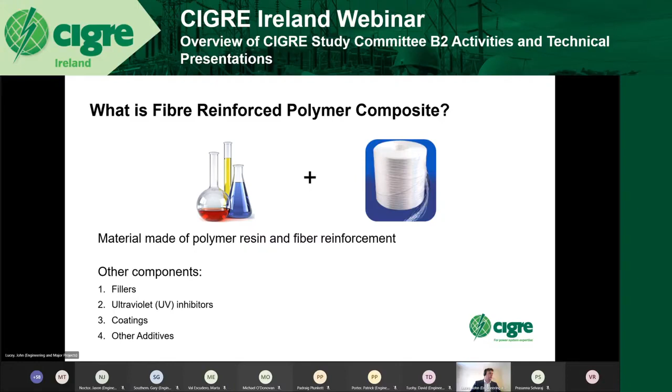Looking at the fibre types, there's a range of fibres now typically available. I think everyone's aware of carbon fibre, glass fibre or fiberglass, as most people would refer to it. There are other fibre types like basalt fibres and aramid fibres, which is Kevlar. I think there's boron fibres as well. But typically it's e-glass, so fiberglass is typically used for overhead line structural applications.

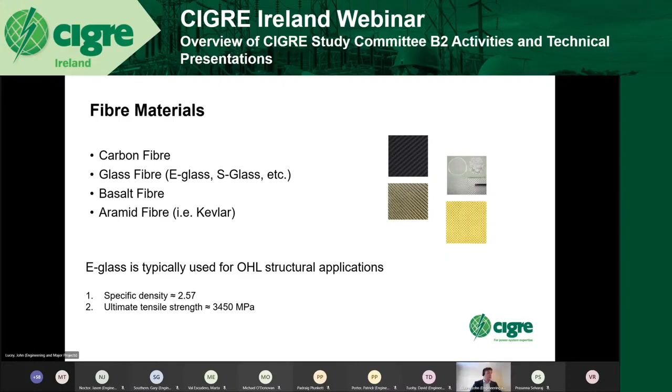The main reason: while carbon fibre is lighter than e-glass and has a higher stiffness, it's much more expensive, and some of its properties and process characteristics are not well suited for use in composite utility construction. So typical reasons for using e-glass: high production rates, relatively low density, it's heat resistant, good chemical resistance, it's relatively insensitive to moisture. It's non-conductive, but for overhead line structural applications it's not a certified insulator. But probably the main reason is the low cost relative to other fibre options.

The thing to note on the resin systems is that typically there are two major classes of resin: thermoplastic resin and thermoset resin. The thermoplastic resin is pliable or moldable above a specific temperature, so you can reform it, whereas the thermoset resin sets and that's it. Typically it is the thermoset resin that's used for transmission structures. Depending on the requirements, anywhere between 30 and 70% of the volume could be resin, and vice versa for the fibres. Typically for overhead line structures, you try to keep the fibre content quite high because it gives you the material properties you want.

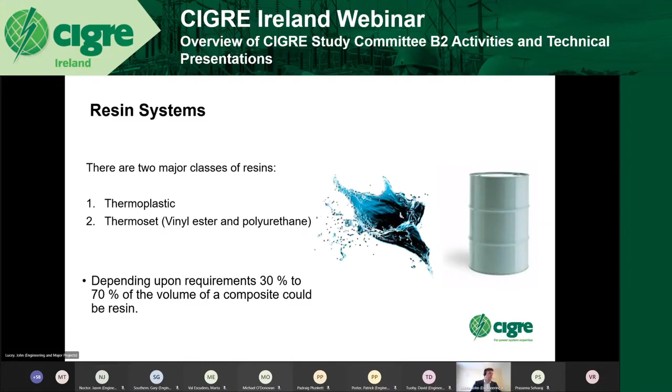The manufacturing process: I've just pulled out the two main manufacturing processes that are used at the minute for making FRP materials for overhead line structures. There are two other primary methods of making FRP material. There's a centrifugal casting method, which I think is used for concrete poles as well, and there's also a resin infusion method, which I think is used for wind turbine blades. But primarily for overhead line applications, it's a pultrusion method or a filament winding method.

To go through the pultrusion method, you have the creels of fibres which are pulled through a resin bath, so they get coated in resin. They're then forced through a heating die, formed into the shape you need and then cut to length. Probably the main thing with pultrusion is high output. It's a continuous process, similar to making steel.

Whereas with the filament winding process, it's slightly different. It starts off the same. The fibres are pulled through the resin bath, but after that, it's guided onto a spinning mandrel. So probably the big advantage of filament winding over pultrusion is that you can taper the shapes.

Because you can taper them, you can stack them, you can modularize the poles themselves, and you can stack them on top of each other, where you can't really do that with pultrusion. They're all the same size. So typically for the pultrusion poles that are on the market, you'd get to about 18 or 19 meters max. Whereas the filament wound poles, you can go up to anything up to even 52 meters.

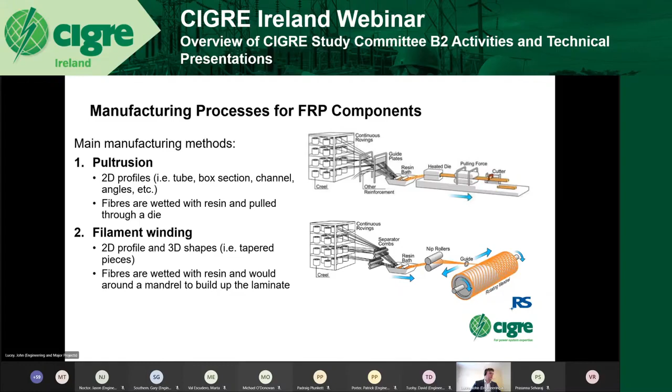Advantage of FRP structures, as mentioned, I think everyone's probably aware of, there's a weight reduction. Anything up to 25%, or down to 25% of steel weight can be observed. That's probably at the extreme end, though. They're non-conductive, again, although they're not a certified insulator, which is an important point.

They have a long service life, so I'm not sure whether you can make out on the image on the top right, but on the actual tag, it was installed in 2009, and the pole itself in the background is as good as day one. The only issue is actually the self-tapping screws, which have started to rust. So I think the learning from this was the actual pole supplier in this case actually switched to stainless steel self-tapping screws.

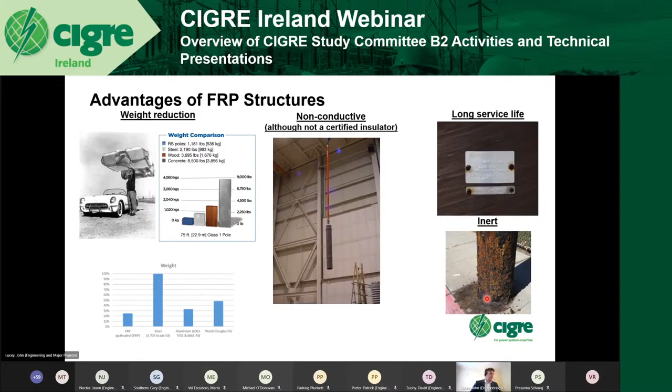They're inert, so you don't get leaching like you could potentially get in creosote poles, wood poles. They're rot resistant, again, when compared to wood poles, they're corrosion resistant compared to steel. And probably another one, although not a major issue for the Irish climate, is they're pest resistant. So the last one here is actually, believe it or not, woodpecker holes in poles, which is a big issue in America.

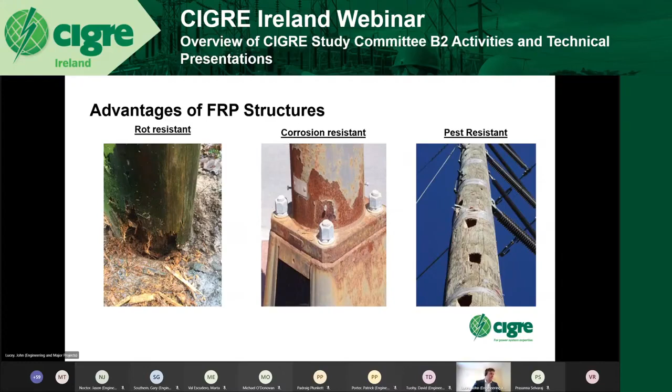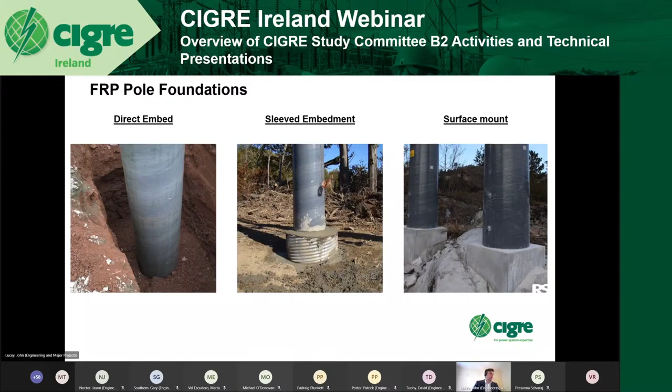Pole foundations themselves, so a quick slide on that. Typically, you try to stick to direct embed. It's the cheapest option. But as maybe the soils get poorer or the structures get higher, you start getting into sleeve embedment, where you put a sleeve in the ground and you either fill it with backfill material or concrete. For rocky ground conditions, you can also surface mount the poles. So the main thing is, depending on what ground conditions you have, there usually is a solution for installing them.

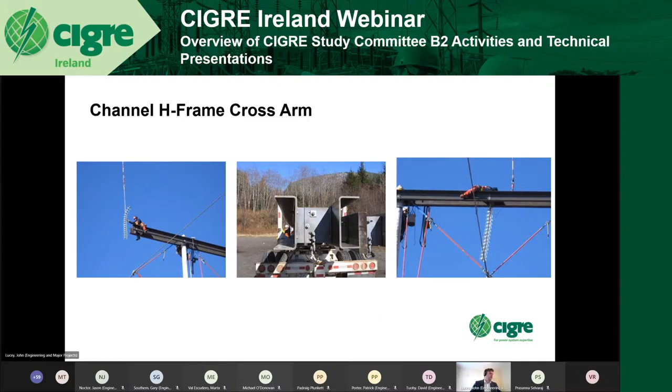Just one or two slides on cross arms. Obviously, the focus of the presentation up to now has been on poles and lattice structures, but cross arms are another opportunity to use FRP. So there's 3 examples here, I think again from the US, where they have been using FRP cross arms. Here's another example where nearly the entire structure is composite. So you have composite poles, composite cross arms, and composite cross braces. Typically, the connections are still steel, but the bulk of the material is composite.

Just one or two slides on a cost comparison, which was included in the technical brochure. Probably the main caveat is the cost section offers guidance to put a business case together to justify the use of FRP material. The actual figures would probably need to be calculated on a country by country basis and project by project basis, because they are quite specific and sensitive depending on tooling and work methodologies in particular countries, and climate and ground conditions.

Probably the main thing is FRP poles cost more to purchase than wood poles. Typically, the purchase price is between 3 to 5 times for a distribution wood pole, and 2 to 3 times for transmission poles. The main thing that has to be taken into account in your cost comparisons is what they call a TIC-TOC analysis. So a total installation cost and total ownership cost analysis should be done.

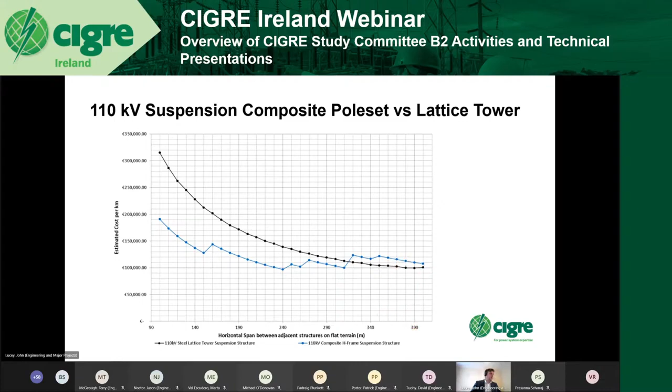Material testing of FRP transmission structures. So the technical brochure gives reference material for a whole range of material tests for FRP materials. It's broken into probably three main sections. There's mechanical testing, environmental testing, and electrical testing. So mechanical testing, you'd have abrasion tests, impact tests, tensile and compression tests, and fatigue. But probably the main ones are the full-scale prototype structure tests, type tests.

From an environmental point of view, UV accelerated aging tests and moisture tests are probably the big ones. So pull tests on poles. As the dramatic image on the right illustrates, they do bend.

But looking at the large displacement in this probably doesn't give the whole picture, because if you did a similar test with a wood pole, you would find that the displacement would be the same, or even the composite is probably just ever so slightly stiffer. The poles are obviously benchmarked off wood poles, so the properties that the suppliers try to get out of the poles are benchmarked off the wood poles, so you would expect a similar performance from a deflection test.

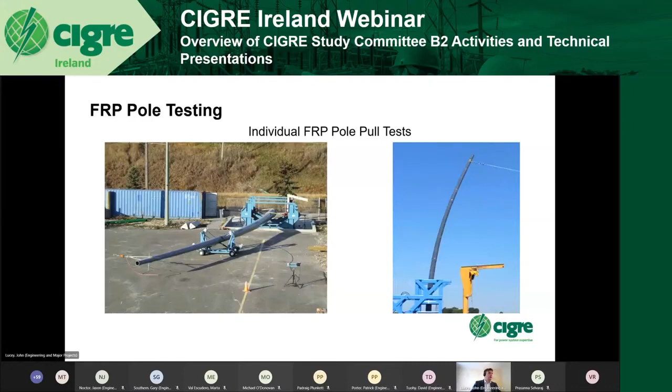Similar to the pole bending test, you can do a full-scale type test of a composite structure. So the example in the image on the right is actually some work ESB International has done with EirGrid, looking at 220 kV composite pole structures. So this is a test station in EUCOMSA in Spain. It looks like a small structure, but it's actually about 28 meters tall, this example. So it's quite large. It's just the test station is even larger.

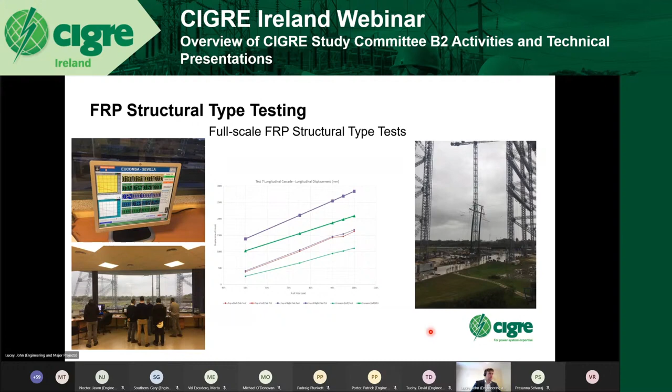So you can see again that there's a significant bend in the pole, but I think this was actually a longitudinal cascade load case. But in this case, it would have passed the type test.

Just a quick slide on conclusions. So FRP composite structures offer alternative solutions to traditional construction materials, so wood, steel and concrete. Key benefits: they're lightweight, long service life, corrosion, rot and pest resistance, high dielectric strength, so low conductivity, but again, they're not a certified insulator. They're environmentally inert. Typically the purchase price of composite poles in particular is greater than that of competing materials. However, reviewing the total installation cost and total ownership cost can reduce the purchase price disparity significantly.

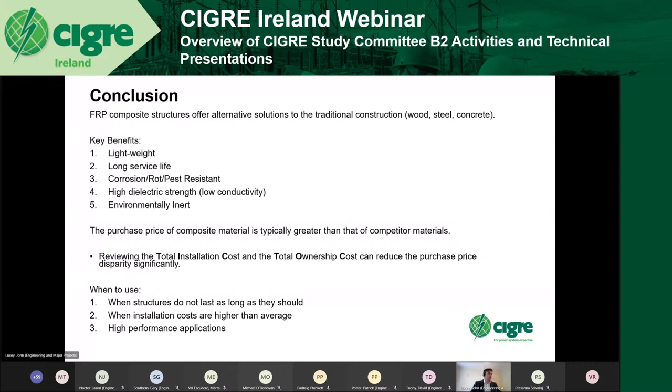I suppose three takeaways are when to use. Firstly, when structures don't last as long as they should, so particularly wet locations where you can get corrosion and rot. When installation costs are higher than average, so if you have challenging terrain and ground conditions, and in other high performance applications, such as where you might need high resiliency, for example, where you have high value equipment on the structures. I think that's the last slide.

So I think the questions are at the end, so I think Paddy's up next. I'm not sure, Paddy, if you're there. I am, yeah. Just about. There's a bit of an echo on the line now. Is everyone getting that? You hear me okay there now? Yeah, that's perfect. All right. Grand. You can see it okay there, Dave? Yeah, I can. Good stuff. Grand job. Look, I'll get going then.

So, good afternoon, all. For those who don't know me, my name is Paddy Porter. I work in the HV projects overhead lines group in ESB. My presentation today is going to cover, as Dave mentioned, a paper we submitted for Paris last year, Paris 2020, which did move to an e-session online. So anyone who attended that e-session might have seen the paper. They were all just pre-recorded presentations. That's what I'm going to run through today.

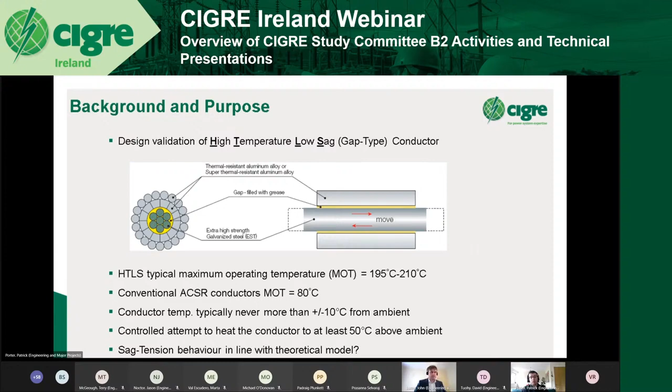So the high temperature test, really what we were doing is it was a controlled attempt to heat the conductor on a line to at least 50 degrees Celsius above the ambient. And in doing so, we wanted to monitor or assess the sag tension behavior and basically determine was that behavior in line with the expected theoretical model. So those last two bullet points, they're really a good summary of what the test was and what it was hoping to achieve.

So just a quick background on HTLS conductor, the gap type conductor. It was first introduced back in 2011 as a direct uprating option for your conventional ACSR conductors here in Ireland. The key function of an uprating conductor was to provide a minimum 50% winter rating increase. But also, very importantly, with any uprating conductor, a key selling point is that you have no significant compromise in your clearances and or structure loading. So the benefit there to utilities is that you can utilize your existing assets as much as possible where feasible.

In total then, we had 4 designs of the gap type HTLS used here in Ireland, 2 at 110 kV and 2 at 220 kV. And I think to date, approximately 10% or around 760 kilometers of the transmission grid has been upgraded, but I would say that figure is likely to be closer to 850, with work ongoing in the next 12 to 24 months.

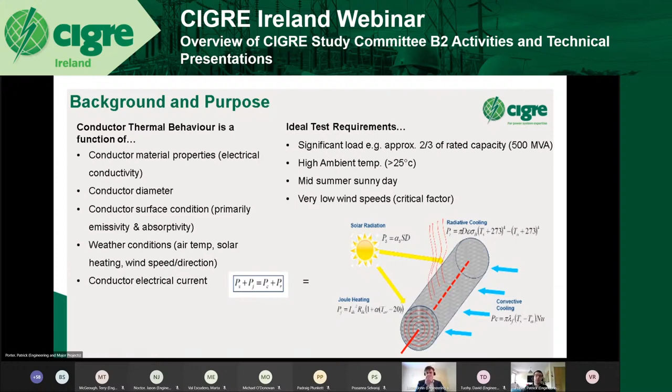So when talking about a high temperature test, we're really primarily concerned with the thermal behavior of the conductor. And we know that behavior is a function of numerous factors: the conductor material properties, the diameter, the surface condition, the weather conditions in which the conductor is operating, and finally the conductor electrical current or load. So we know that for a high temperature test, the ideal test requirements would be a significant load on the line, so we needed at least 2/3 of the rated capacity. We wanted a high ambient temperature, ideally above 25 degrees Celsius, so that was likely to be a midsummer sunny day. And the last factor, which is one of the more critical ones, is low wind speeds. And that's something that we'll touch on in a few slides.

So really, having agreed to carry out the test, the first stage of the overall process was to select a suitable line. So following some initial discussions with EirGrid, Cashla–Prospect 220 kV line in Galway was selected. The line would have been uprated back in 2012 with a GAP 586 HTLS conductor. And importantly as well, which was quite useful, we had a 3D design model, PLS-CADD model, readily available. So that saved us starting from scratch, because we would need that design model to carry out the design validation exercise, which we'll touch on later. For anyone who's not familiar with PLS-CADD, that's the main design software package that we use here in ESB for pretty much all aspects of line design.

On the operational side then, EirGrid took into account numerous factors when selecting a suitable line, and I think they settled on Cashla–Prospect for a number of reasons. One of them being its proximity to local generation in that area, the load demands on the particular line at that time, but also then the projected or anticipated system configurations due to outages in the nearby area.

So the actual configuration of the transmission grid then on the day of the test, that would have included an outage on the Oldstreet–Woodland 400 kV circuit, and then in addition to that, constraining on generation, a Moneypoint and a Tynagh unit. And those factors combined then enabled 500 MVA to flow on the line on the day of the test.

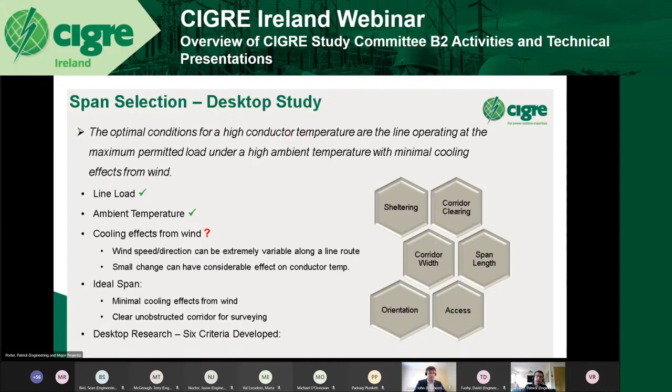So considering those factors, we developed 6 criteria that are summarized there. And we assessed each individual span on the entire line and just ranked them accordingly against the criteria. And from that, six spans became apparent as potential candidates for the day of the test. So we followed up each of the 6 spans with a site visit and further assessed them against the criteria. During those site visits, it became apparent that some of them just weren't accessible. So eventually we settled on span 57–58, which is shown there in the aerial imagery.

So span 57–58, it's just north of Loughrea there. Relatively long span, 450 metres, so that was a positive. As you can see in the aerial imagery, a bit of a sheltered corridor on the southeasterly side relative to the prevailing wind direction, so hopefully minimising any cooling effects from wind. And very importantly then, it was also accessible both by foot and by vehicle from a local farm there where we had agreed access with the landowner in question.

So following that then, the next stage was to actually carry out the test itself. So it was done on a single day. I think it was a Thursday or a Friday, the 28th of June, back in 2018. So there were a number of us assembled on site the day of the test from ENMP, ESB Networks and EirGrid, carrying out various functions and roles.

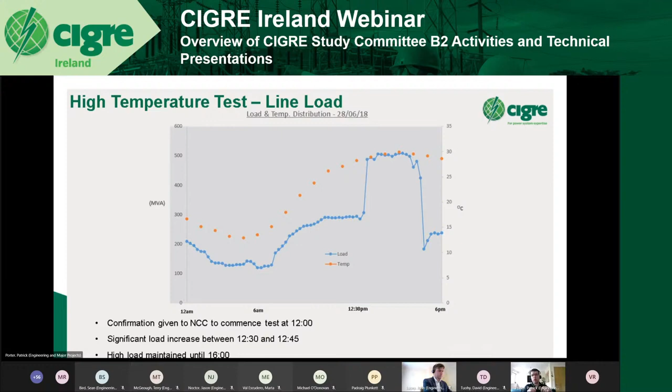This graph then just shows the load distribution and the ambient temperature on the day of the test. So as you can see, the blue line, it was about 12:30, 1 o'clock, confirmation was given to the NCC to commence the test. So we hit 500 MVA in the line fairly quickly, and that high load then was maintained for about 4 hours. And throughout that time, you can see the ambient temperature in orange there. So we hit the hottest part of the day around 1 o'clock, which was near 30 degrees. So it did prove to be ideal test conditions for the test.

And that point cloud data, we then take that and we load it back into our 3D PLS-CADD design model of the line in that particular span. In addition to that, then, as I mentioned, metadata. So these are the factors that can influence or control the conductor thermal behavior, your ambient temperature, your wind speed, your wind direction, etc. So those factors we just recorded throughout the day as well, in addition to the scans.

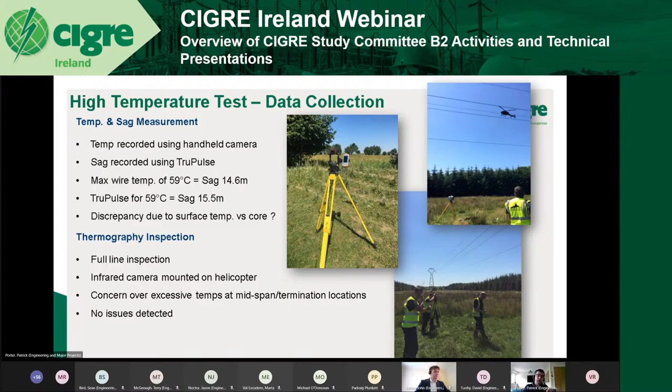So having completed the test on site, the next stage was to begin the technical or design validation exercise, now that we'd collected all the data from site. The first stage of that is to calculate your conductor temperatures for each of the 4 scans. We're using the thermal calculator model in PLS-CADD. We have our various inputs: ambient temperature, wind speed, load, etc.

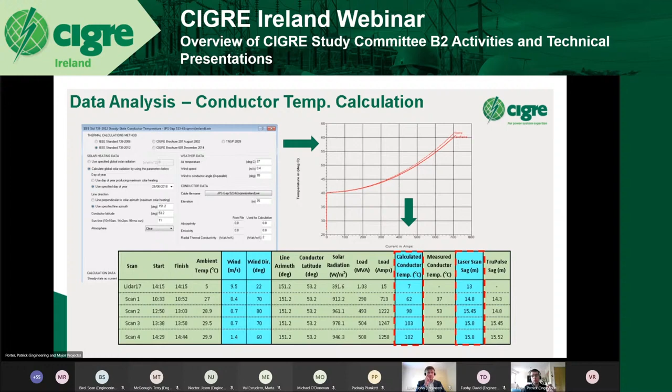What we said we would do is repeat the exercise, i.e. calculate the conductor temperature and include that for comparison purposes, because ideally we should get the same results when we project it out to any temperature. You'll note the 2017 LiDAR, the top row: the ambient on the day was 5 degrees, calculated conductor temperature was 7 degrees, normal loading conditions on the line, so you couldn't get further away from what we had the day of the test, 30 degrees and 500 MVA. But we've included that as part of our comparison as well.

PLS-CADD then automatically calculates the sag tension on that particular span. It locks it in or clips it. And what that does then is it allows us to project the conductor out to any weather case for comparison purposes. Now, that could be an everyday case of 15 degrees Celsius. It could be high wind, it could be heavy ice. But for the purposes of the report in the paper, and typically what you would use would be the maximum operating temperature, which we were assuming to be 200 degrees Celsius.

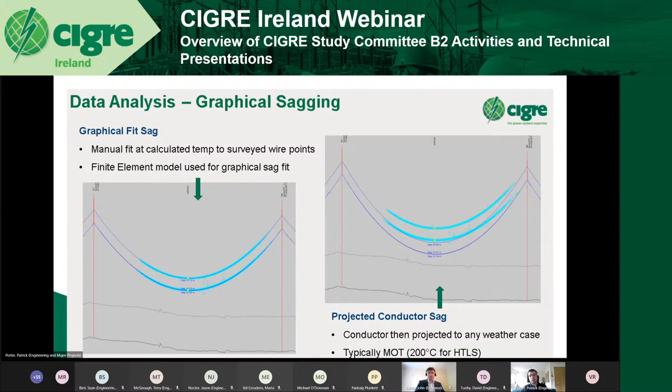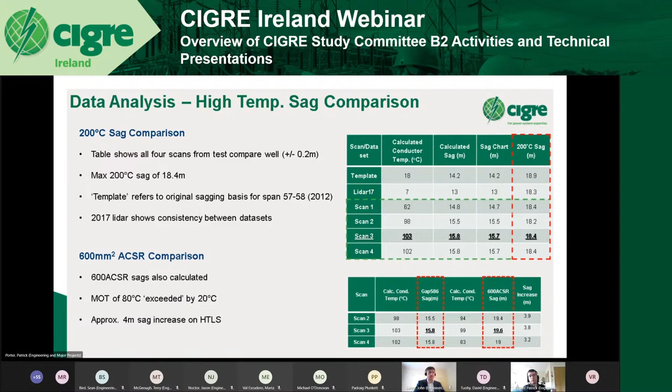Conclusions then. So look, we successfully completed a high temperature test on an in-service major 220 kV circuit. We had a line operating under a period of high load for nearly 4 hours. As you've seen from the slides and the graphics, the conditions on the day really did prove to be ideal for a high temperature test. I don't think we've probably even had a day like that since. So we were lucky in many ways.

We calculated a maximum conductor temperature of 103 degrees Celsius, so well in excess of 50 degrees over the ambient, which we set out to do. When we included then a separate data set, the 2017 LiDAR data set, we found quite good correlation across all. So that, in a way, validated the approach and gave us a good benchmark.

And I think overall, the paper and the report notes, and hopefully have shown in this presentation today, that the results certainly served as a design validation of the conductor behavior, and they were quite well received by both ESB and EirGrid. So going forward, that should enable both of them to exploit that additional capacity that's out there on the 10% of the grid where it's needed.

And I think going forward also, particularly looking forward to 2030 and the ambitious targets that are out there, and the transformation of the grid that's been so widely discussed now, HTLS conductors certainly have a role to play there. Now, whether that's gap type or alternatives, who knows? But I think there's certainly a place for it. So overall, yeah, worthwhile exercise.